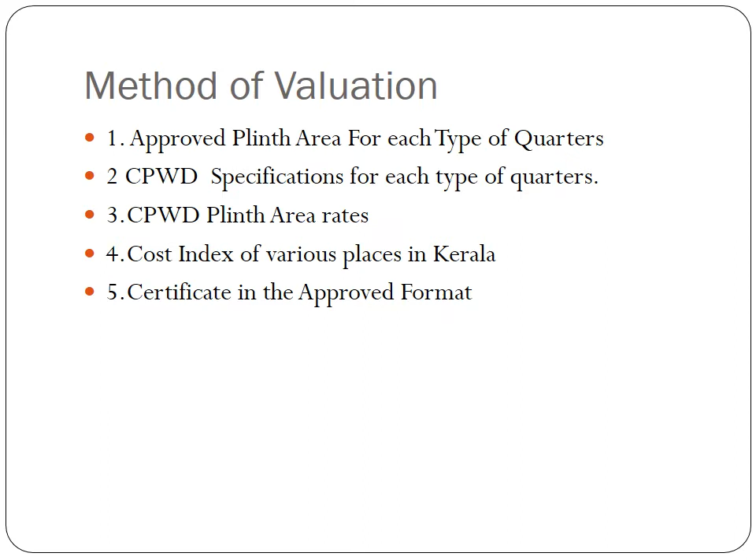There are some apprehensions among the valuers that by adopting CPWD plinth area rates and CPWD cost index, will it actually reflect the true market value of the building, or will it be more than the market price? But as per the government directions, the method of valuation adopting CPWD plinth area rates from time to time has to be followed as decided by the government for the specific purpose, namely valuation for registration of sale deed.

There will be a question, why CPWD plinth area rates of 2020 have not been adopted. The CPWD plinth area rates 2020 has been published only two weeks back. Only the plinth area rates have been published so far; the cost index for various places have not been published. Without the cost index, it is not possible to arrive at a reasonable value. When the cost index of 2020 is published, the CPWD plinth area rates will be adopted for valuation.

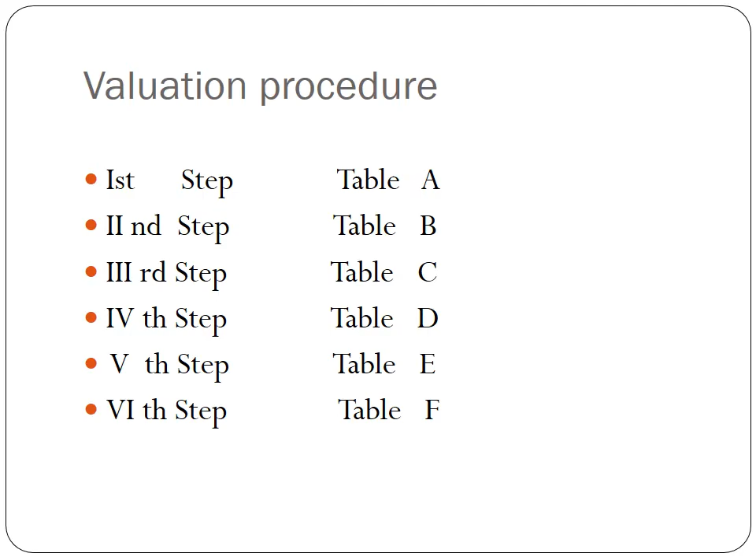This Table A gives the revised scale of plinth area for different types of cottage. You can see the first column giving the type of cottage, then the second column showing the scale of pay, that is not concerning us, then the third column gives the area of the cottage. From this, you can compare the building in question with the revised scale of plinth area provided in this table. There, you will come to the conclusion of which type of cottage the building to be valued belongs to.

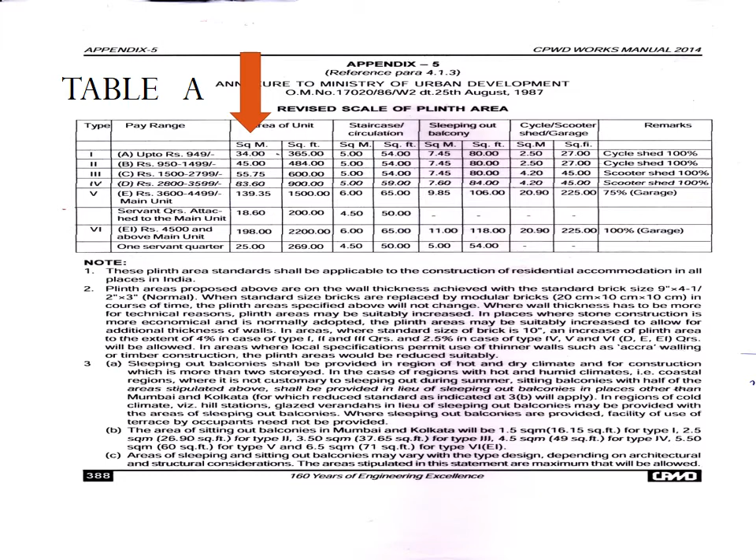This is Table B, giving the CPWD specification for residential buildings. You can see different types of cottage and also the specifications for foundation, superstructure, doors and windows.

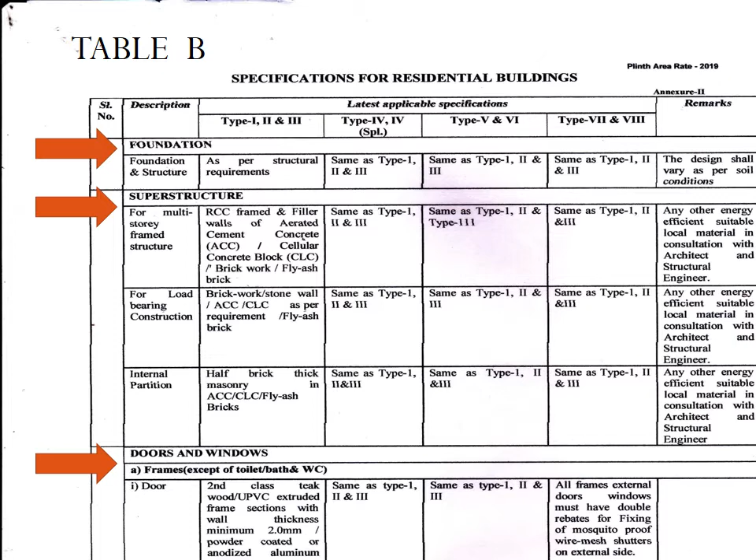This is the continuation of the specification showing doors and windows of toilet, baths, WC, main doors of external doors, etc.

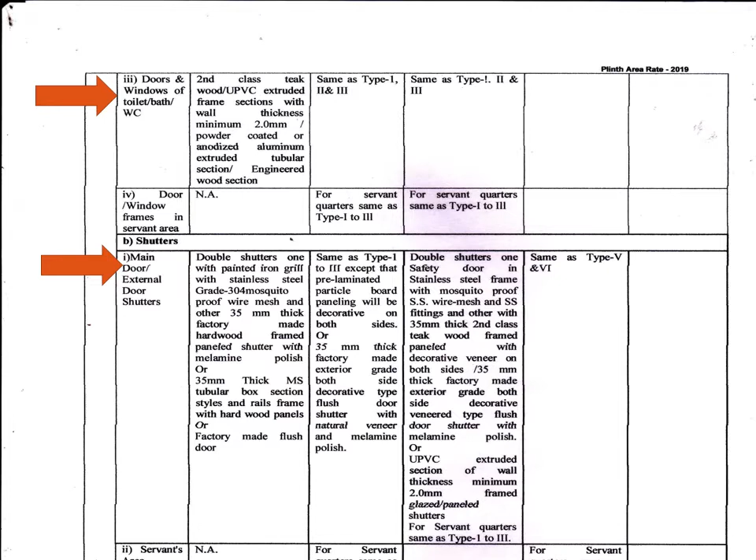This is also the continuation of the specification showing the shutters of windows, flooring for each type of cottage.

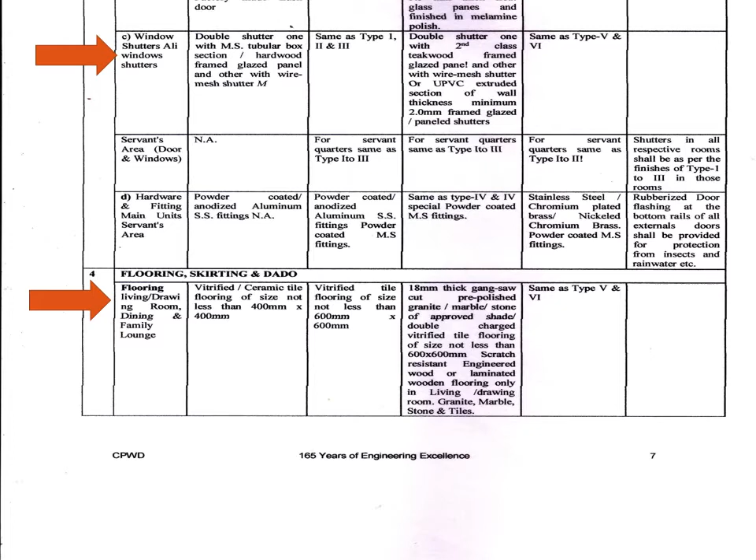This is also continuation showing the finishes and external finishes.

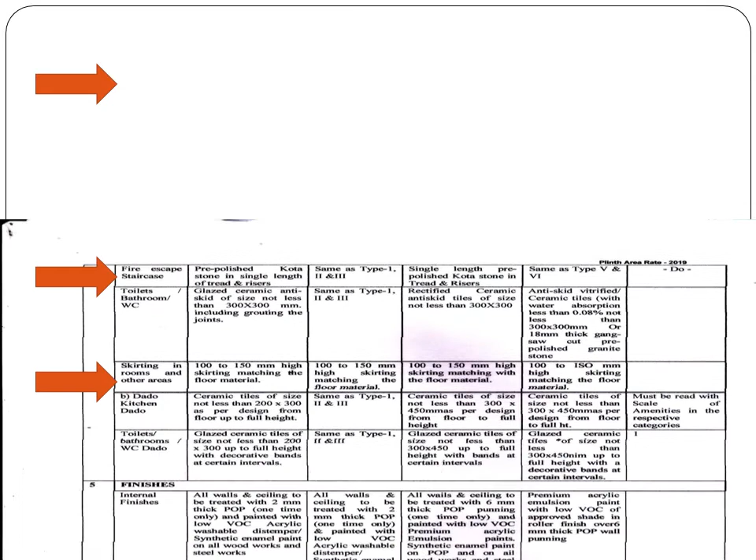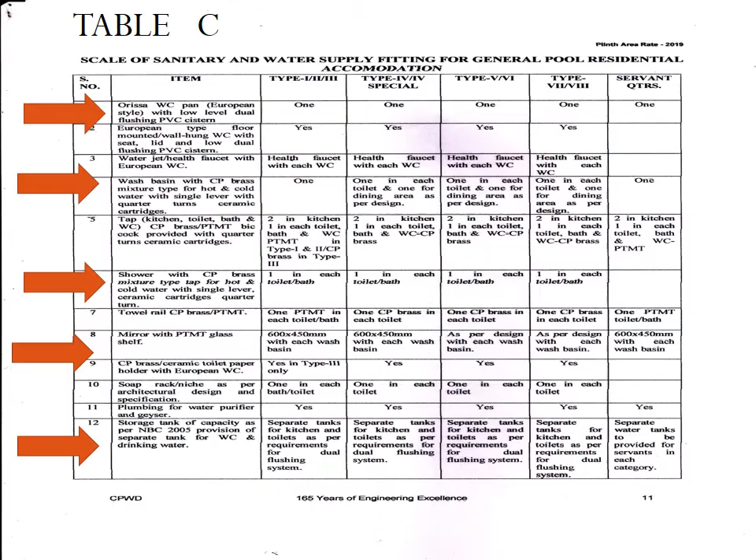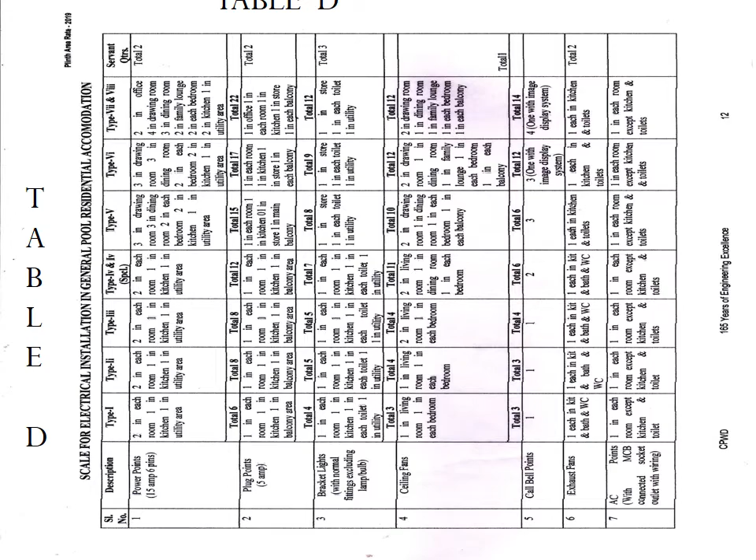This is table D showing the specifications of electrical installations in different types of residential accommodation. Please watch here. The tube lights are LED, the lights are also LED. So you have to compare the building under valuation whether LED lights and LED tube lights have been provided. If it is in a lesser specification, you have to make necessary deduction in the value.

This is continuation of the electrical installations.

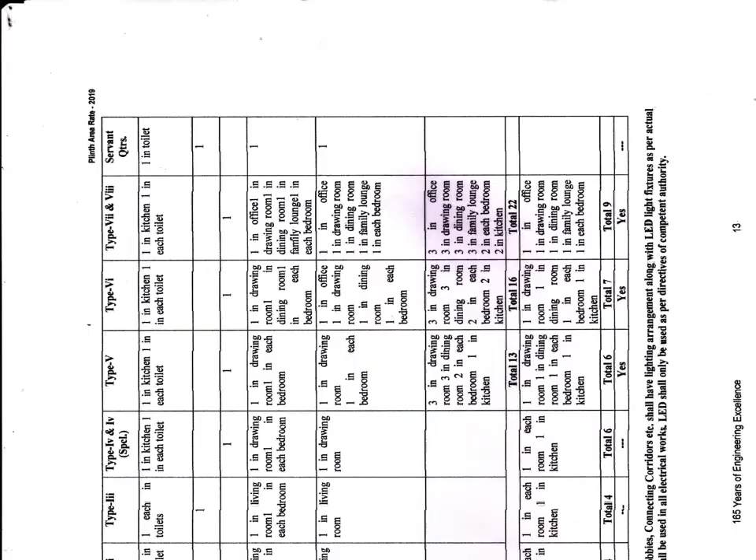This is the most important table in this valuation, table E. This is the CPWD plinth area rates as on 1/4/2019. The arrow shows the rate for load-bearing residential building, 16,600.

In the CPWD plinth area rates 2012, the residential building type 1 to 7 were divided into two categories and two rates were given. But in the plinth area rates of 2019, only a single rate has been given for type 1 to type 6 quarters and type 7 to type 8 bungalows.

There is a possibility that CPWD may have worked out an average value for all the quarters. This we will have to bring it to the notice of the Central PWD regarding this anomaly and has to be corrected.

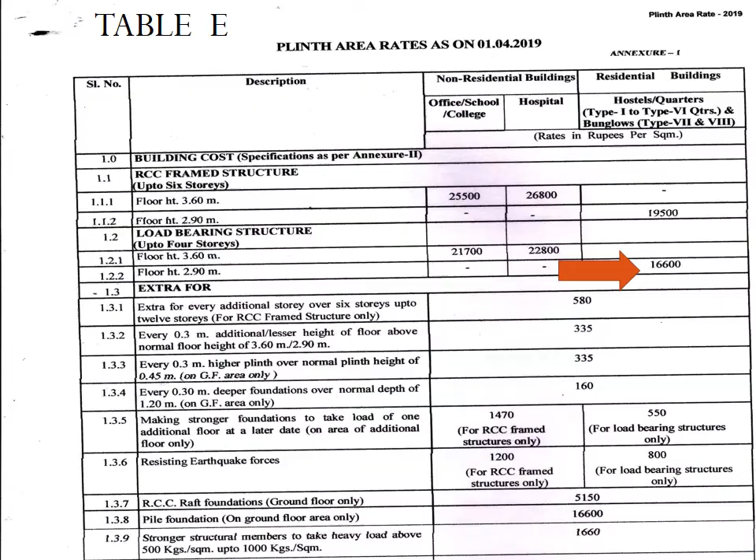Also you see internal electric installation, it is 12.5%. These percentages are at a higher side, but this is because of the higher specification provided for water supply and sanitary installations in the specifications, as well as the electrical installation.

As I have told earlier, these tube lights are all LED and the lights are all LED. So because of this higher specification, the rates have been given at a higher value. In case the building you are valuing doesn't have such higher or superior specification, and if it is lesser in specification, necessary deduction will have to be made by the valuer.

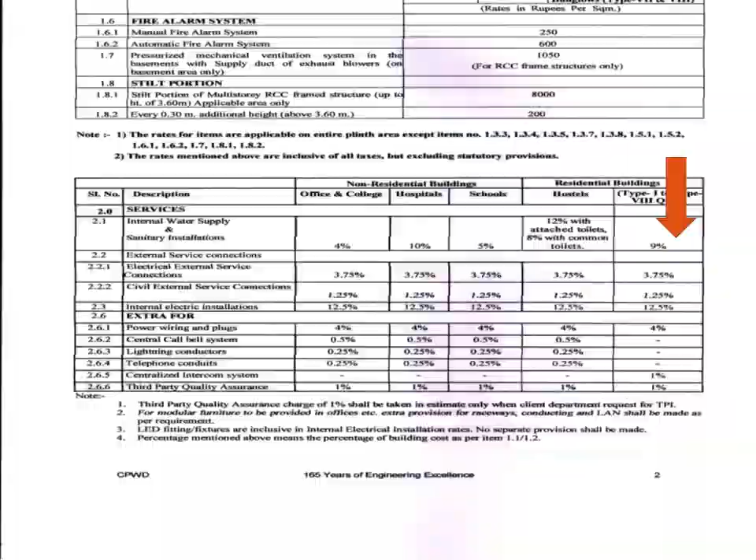This is the third sheet of table E. The arrow shows how to calculate for overhead tank without independent staging. This is 18 rupees per liter, and above it is the rate for passenger lifts.

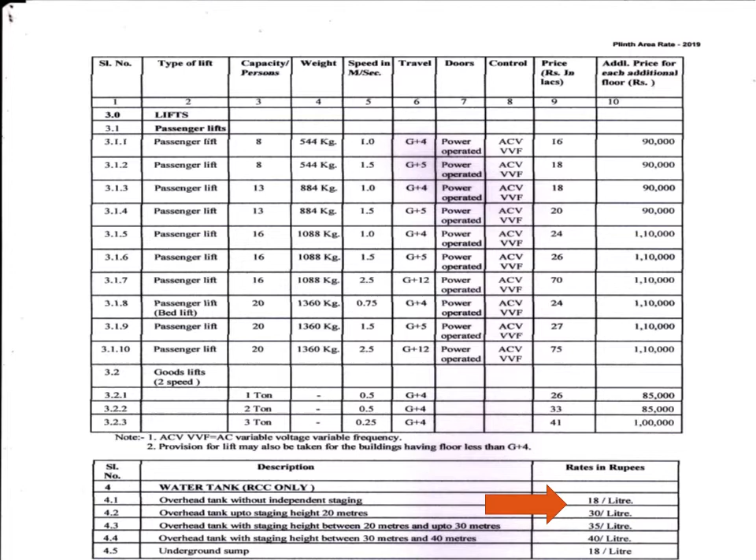This is the fourth sheet of table E. The arrow shows the rate for rain harvesting.

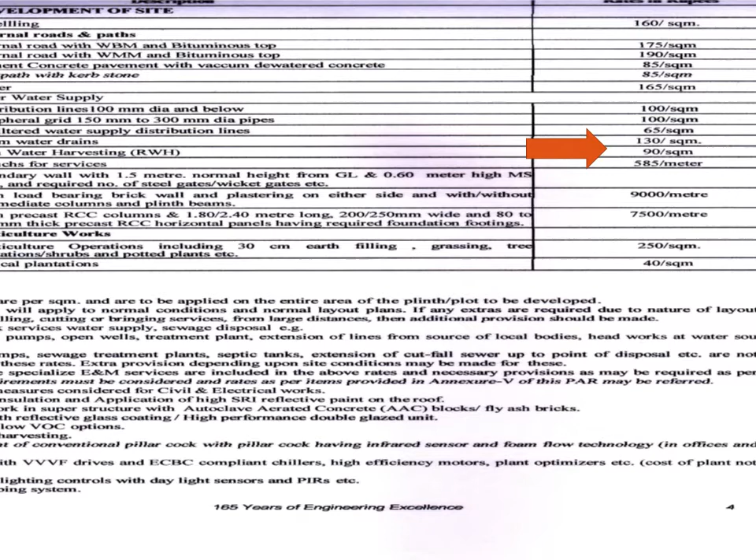The rate you work out as per the tables described earlier, R is the rate prevailing at Delhi, where the cost index is 100. So if you want to

compute the value of the building at Trivandrum, the cost you have worked out at Delhi has to be multiplied by this. Cost index of Delhi is 100, cost index of Trivandrum is 135, so the value worked out at Delhi has to be multiplied by 1.35 to arrive at the value at Trivandrum.

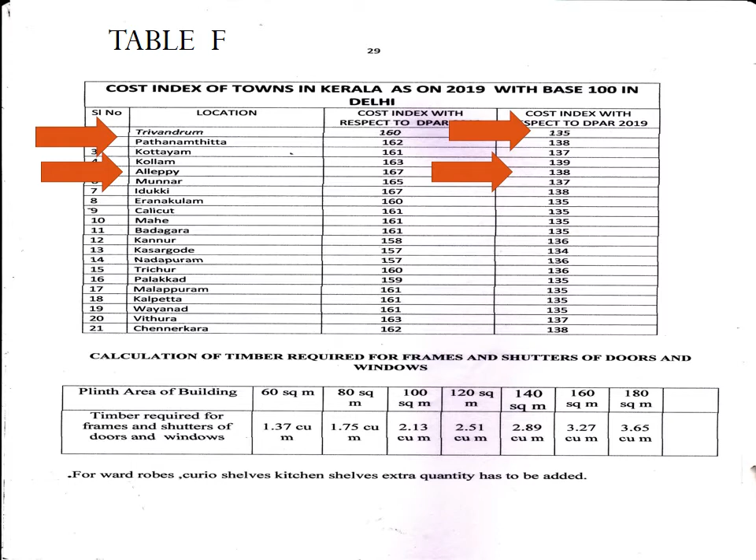The method of working out the value of the building has been explained in my previous narrations, and now we will examine case studies. Here 3 cases have been taken up for analysis.

Case 1. An RCC load-bearing residential building of plinth area 1000 square foot, foundation with RR and cement mortar, for superstructure with brickwork in cement mortar, doors and windows with second class teakwood, wardrobes in bedrooms, shelves in kitchen, walls plastered and painted, flooring with vitrified tile, bathrooms flooring with ceramic tiles, and the sides of walls with glazed tiles.

Building is electrified and has got water connection. The building is newly built, about 9 months old, located in Trivandrum. This is the specification of the building we are going to value.

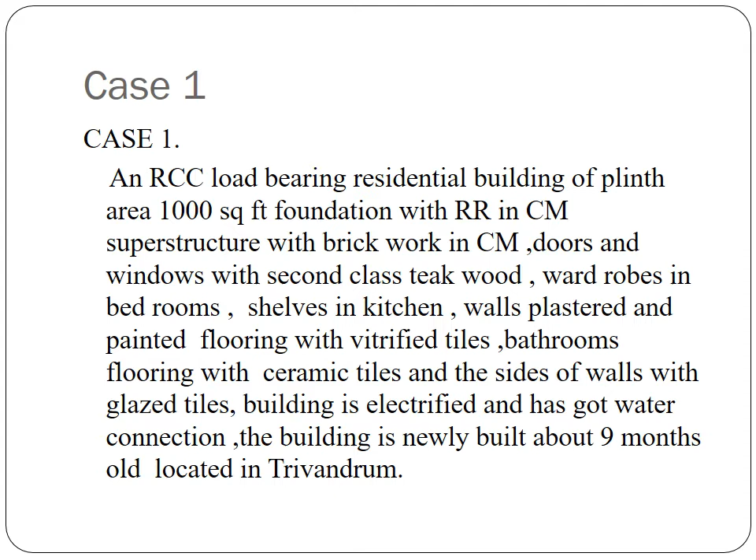Plinth area rate as per CPWD criteria is rupees 16,600 per square meter. Now add services. Internal water supply and sanitary installation at 9% equals 1,494 per square meter. Electrical external service connection at 3.75% equals 623 per square meter. Civil external service connection at 1.25% equals 208 per square meter.

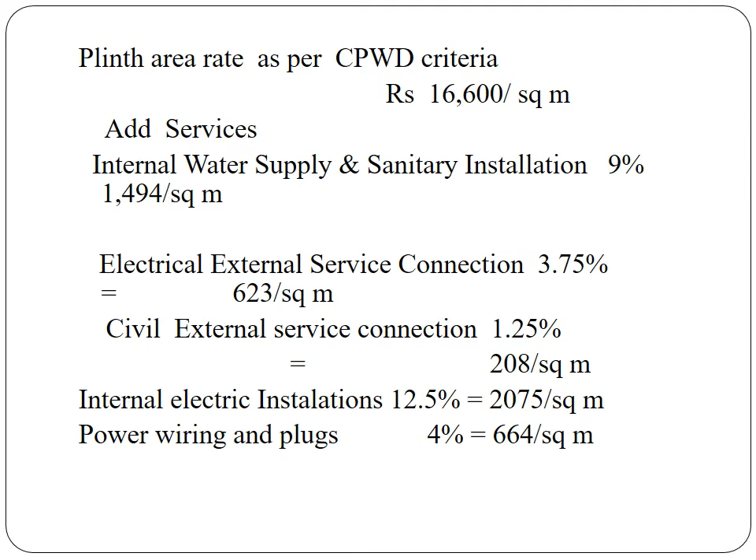Internal installations at 12.5% equals 2,075 per square meter. Power wiring and plugs at 4% equals 664 per square meter. Total amount comes to rupees 21,664 per square meter at Delhi. Hence, plinth area rate per square foot as on 2019 at Delhi is equal to rupees 2,013 per square foot.

The cost index of Trivandrum as on 1/4/2019 with respect to Delhi plinth area rates is 135. The plinth area rate in Trivandrum as on date is equal to 2,013 into 135 divided by 100, which is equal to 2,718 per square foot.

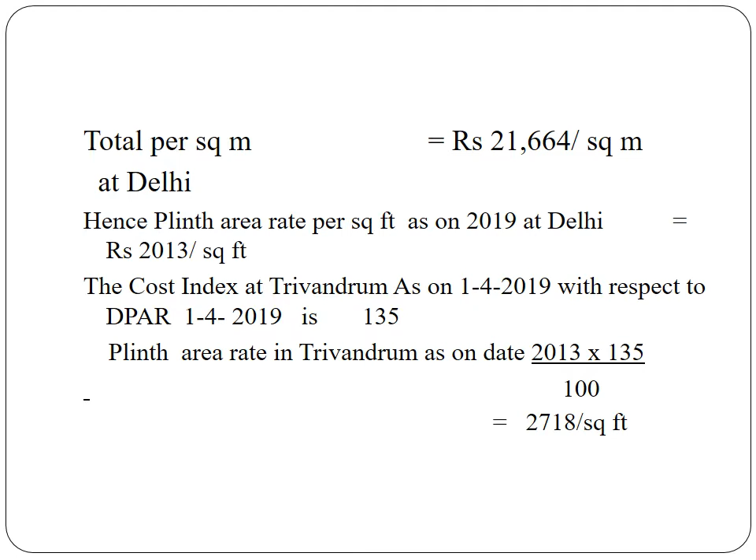Since the building is newly built, depreciation is not considered. If the valuer wants a very conventional valuation, 1% of depreciation can be considered. Without considering depreciation, the value of the building is equal to 1,000 into 2,718, which is equal to 27,18,000.

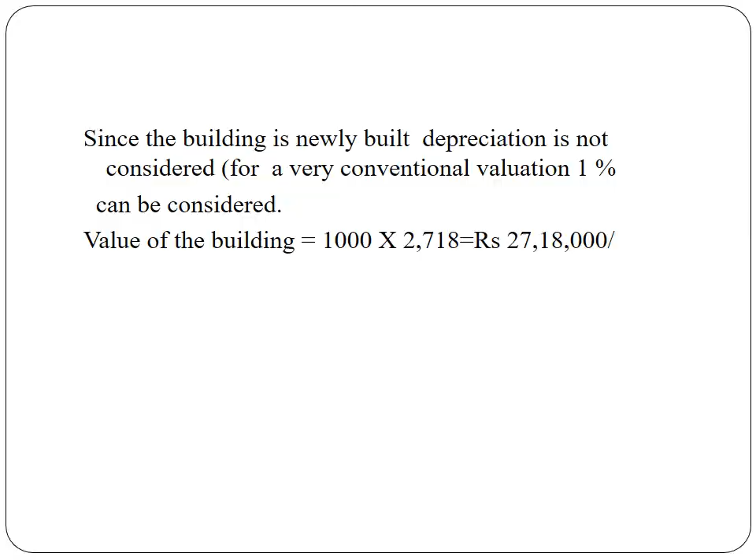Now case 2. Valuation of the building above, with same specification except the doors and windows are with country wood, and the age is 10 years. Plinth area rate as per CPWD criteria is 16,600 per square meter.

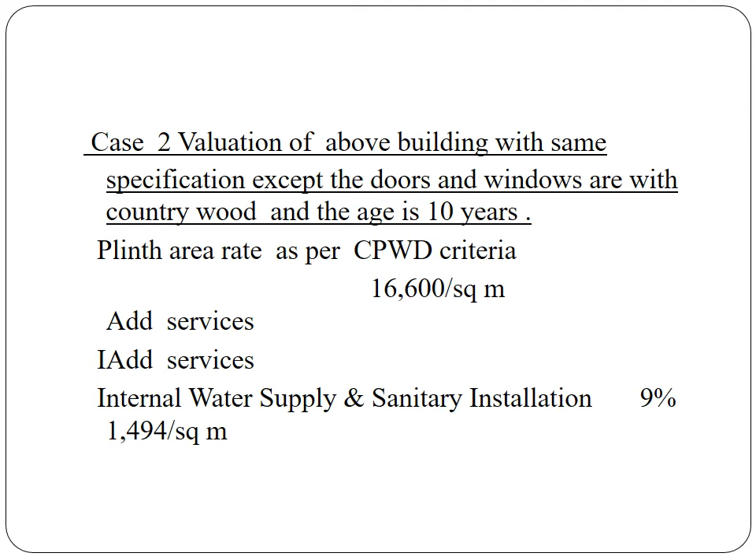Add services: internal water supply at 9%, same as previous one. Electrical external service connection, civil external service connection, internal electric installations, power wiring, etc.

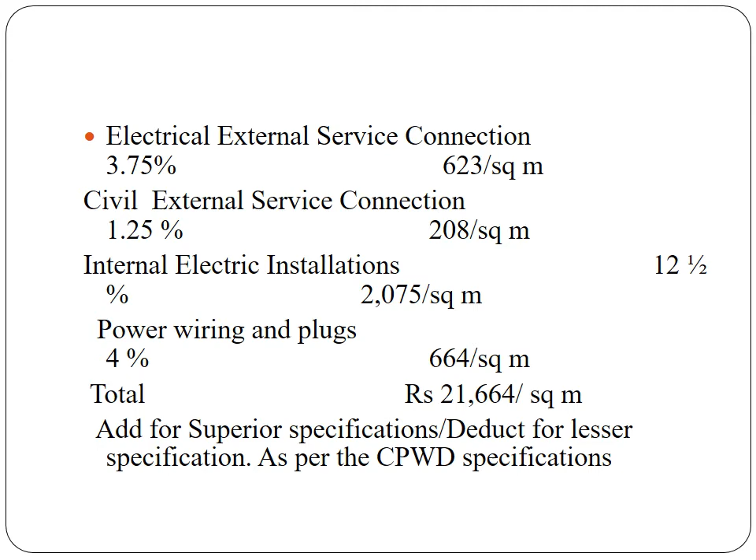This is very important. As per the CPWD specification, the doors and windows are to be with second class teakwood. But in this building, the doors and windows are with country wood. So the difference in cost of second class teakwood and country wood used has to be deducted.

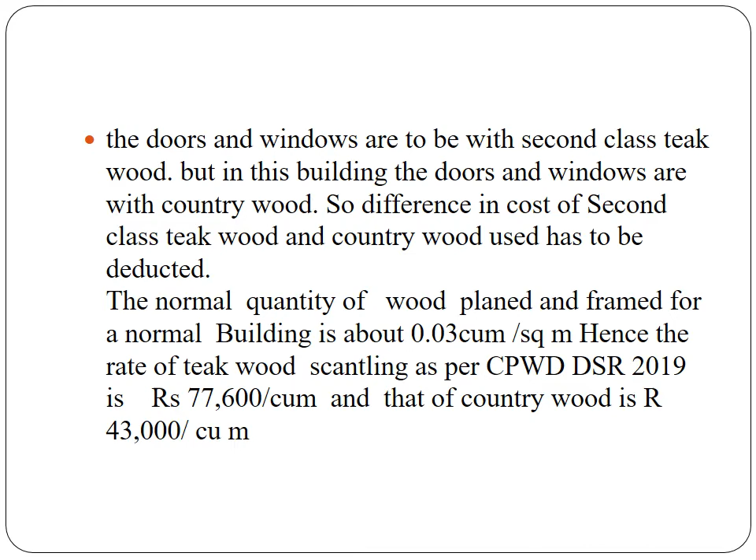Hence, difference in cost of teakwood and country wood is equal to 0.04 into 77,600 minus 43,000, which works out to 1,384 per square meter. This 1,384 per square meter has to be deducted from the plinth area rate of 21,664. Plinth area rate after deduction is equal to rupees 20,280.

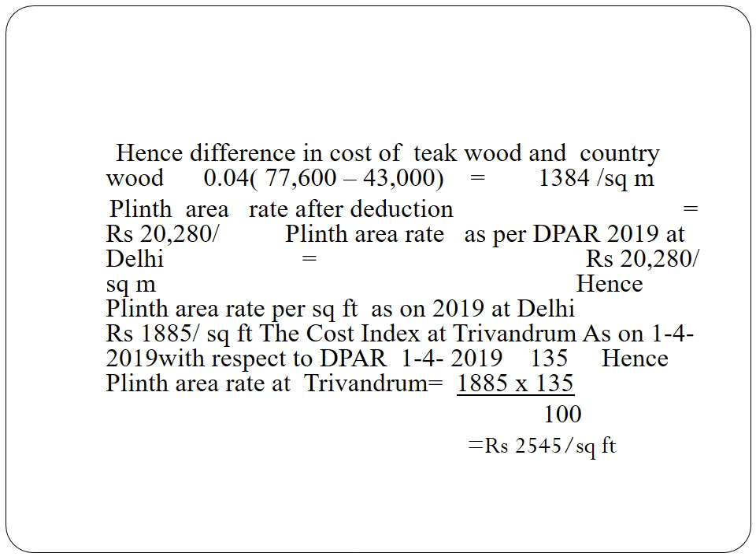So plinth area rate as per DPAR 2019 at Delhi is rupees 20,280. Plinth area rate per square foot as on Delhi works out to rupees 1,885 per square foot. The cost index at Trivandrum as on 1/4/2019 with respect to DPAR 1/4/2019 is 135.

Hence, the building is 10 years old. Estimated total life is 60 years. Hence, depreciation is worked out as 15%. So depreciation amount is rupees 382 per square foot. Hence, the depreciated rate is equal to rupees 2,163 per square foot.

Value of building is equal to 1,000 into 2,163, which is equal to 21,63,000.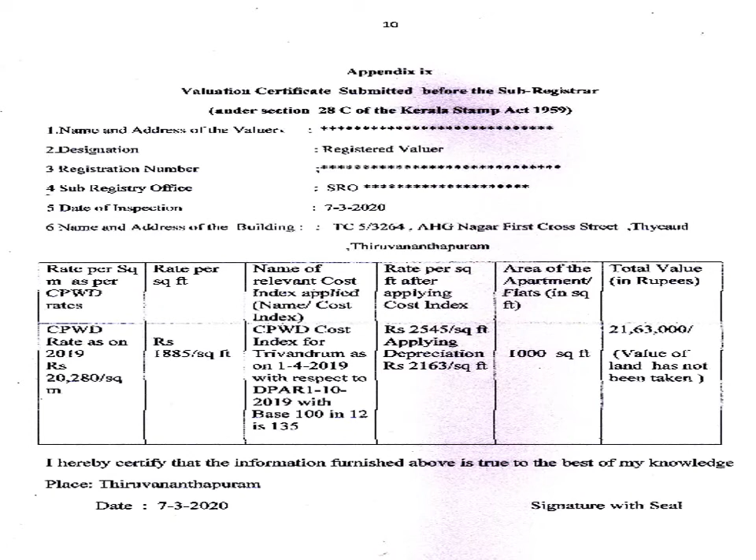In column 4, the rate worked out before applying depreciation is given as rupees 2,545 per square foot. Then applying depreciation, the rate works out to rupees 2,163 per square foot. Because there was criticism about how the depreciation can be shown in this column, this is the way which I have preferred to show the depreciation.

This is case 3. A tile building of plinth area 1,000 square foot with foundation of RR in cement mortar, doors and windows with country wood, walls plastered and painted. Only two small almarah in the bedroom, no mosquito shutters, flooring with ordinary cement. The building is electrified and has water connection. The building is 30 years old.

Building is located in Alleppey. Plinth area rate as per CPWD criteria is 16,600 per square meter.

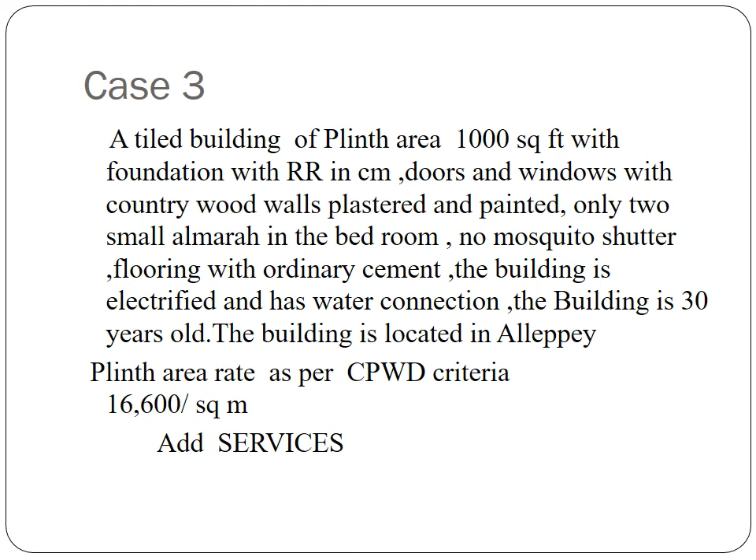Here, since this is an old building constructed 30 years back, the electrical connection will be single phase with just minimal lighting and light fittings. Also, water supply and sanitary fittings will be minimum and not as provided in the specification given in CPWD Plinth Area 2019. Hence, the valuer will make necessary deductions in the rate.

The percentage deduction is the priority of the valuer after assessing the condition. The following deductions are an example and not a strict rule to follow in the percentage deduction. It is up to the valuer to decide.

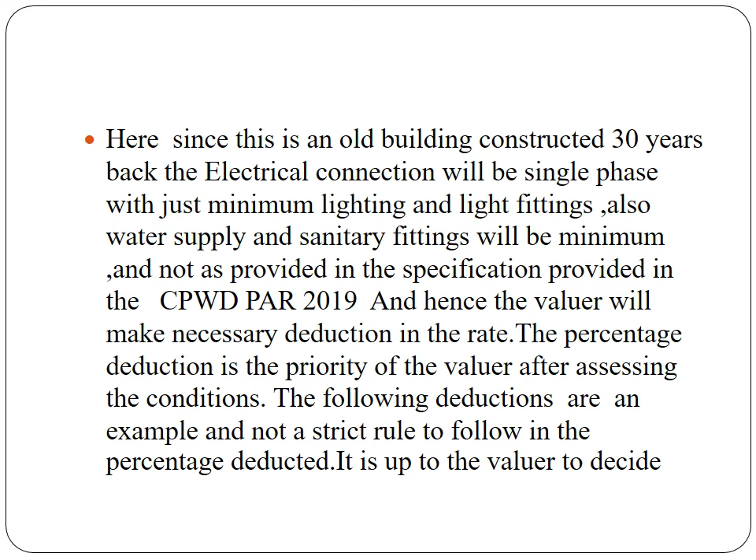Here, the first line, plinth area rate as per CPWD criteria is 16,600. Since the specification of the water supply installation and the electrical installations are not superior to the specifications of the CPWD book, for internal water supply and sanitary installation, instead of 9%, I have given only 6%. Also for internal electric installation, instead of 12.5%, I have given only 7.5%.

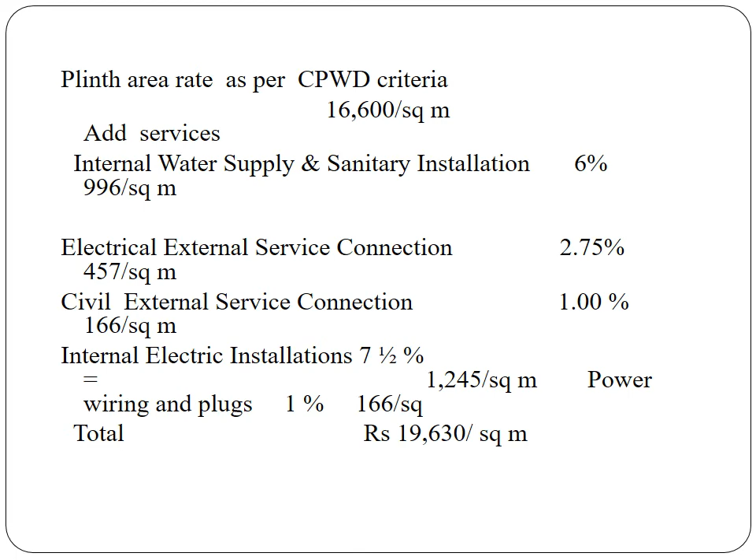According to the specification available in the building, these percentages can be deducted as per the discretion of the valuer. In this building, the roofing is tile roof, and the plinth area rate provided in CPWD specification is for RCC. Hence the difference in cost of RCC and tile roof will have to be deducted, which is equal to rupees 3,000 per square meter.

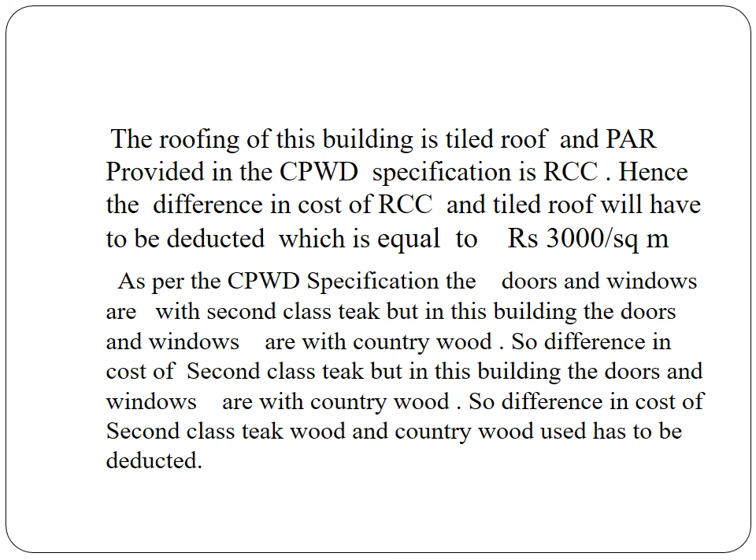As per CPWD specification, the doors and windows are with second class teakwood, but in this building the doors and windows are with country wood. So the difference in cost of second class teakwood and the country wood has to be deducted. So the deduction to be effected.

The normal quantity of wood planed and framed for a normal building is about 0.03 cubic meter per square meter. So for the difference in cost of teakwood and country wood, the reduction will be 1,384 per square meter. Difference in cost of RCC and tile roof is about 3,000 per square meter.

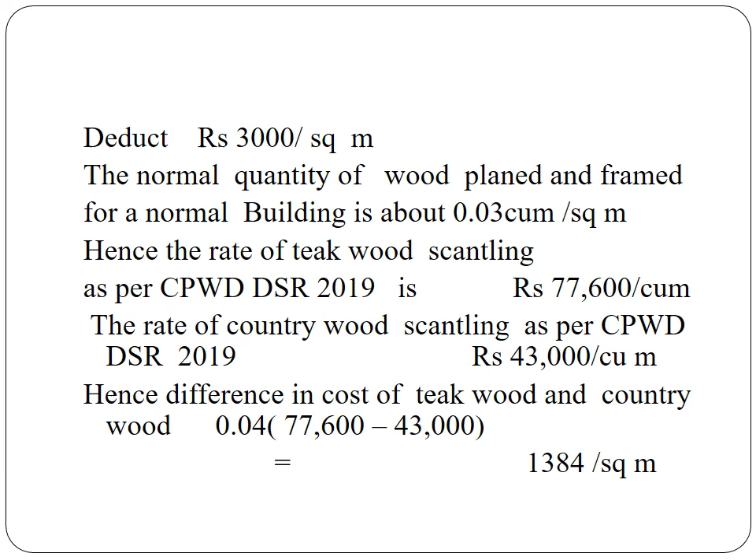Then again, in the specifications of CPWD, wardrobes will have to be provided and kitchen cabinets also to be provided. In this building, it's an old building with tiled roof. There are no wardrobes and kitchen cabinets, so that amount has to be deducted. This is assessed as about 1,20,000 for the 1000 square foot. So this gives the deduction amount as rupees 1,290 per square meter.

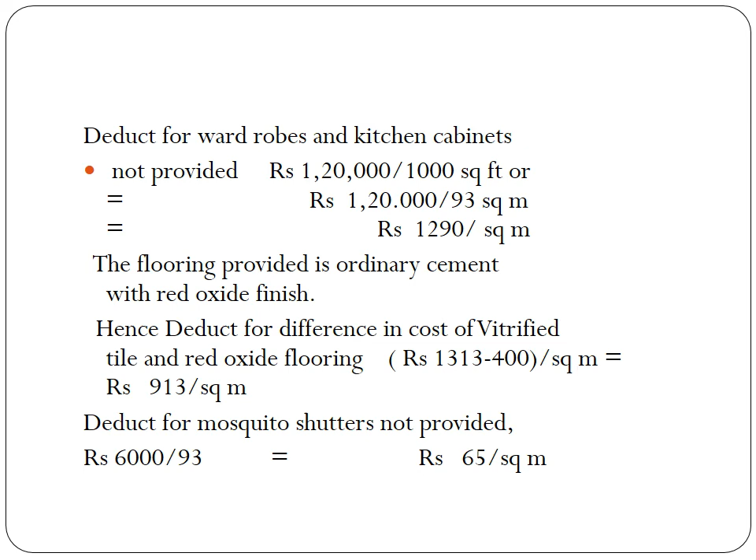In the specification of the CPWD for this cottage, the flooring is with vitrified tile, but in this building the flooring is with ordinary cement with red oxide finish. So we have to make the necessary deduction, which works out to rupees 913 per square meter. Mosquito shutters have not been provided, so rupees 65 per square meter has to be deducted.

So the total deduction to be made from the plinth area rate of 16,600 is rupees 6,652. Total after deduction is equal to 19,630 minus 6,652, which is equal to 12,978 per square meter. Plinth area rate in Delhi is 12,978 per square meter. So the plinth area rate as per square foot is rupees 1,206 per square foot.

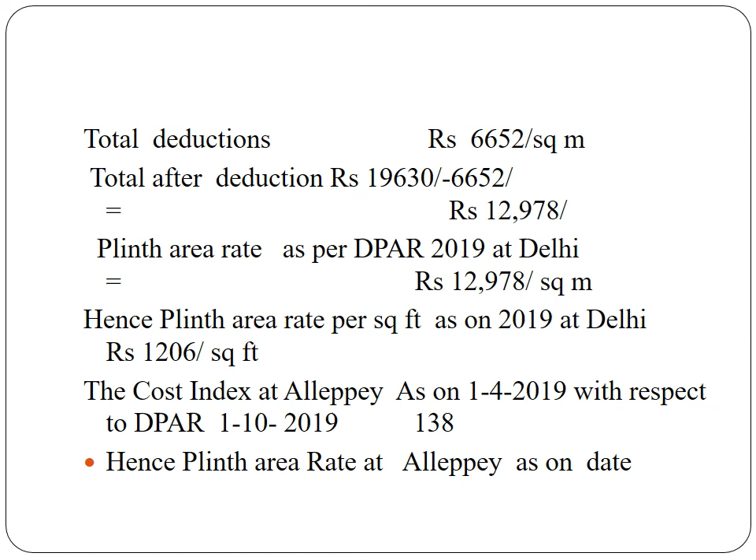Then the cost index of Alleppey is 138. As done in earlier examples, applying the cost index of Alleppey, the rate works out to rupees 1,664 per square foot.

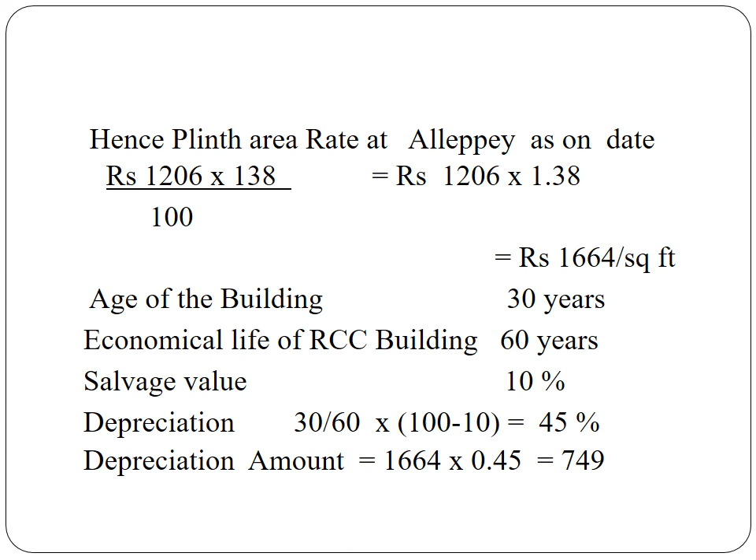Age of the building is 30 years, so in this case the depreciation is 45%. So the depreciation amount is rupees 749. Deducting the depreciation, the plinth area rate for this tiled building having a plinth area of 1000 square foot and 30 years old in Alleppey is 915 per square foot. So the value of the building is equal to 9,15,000.

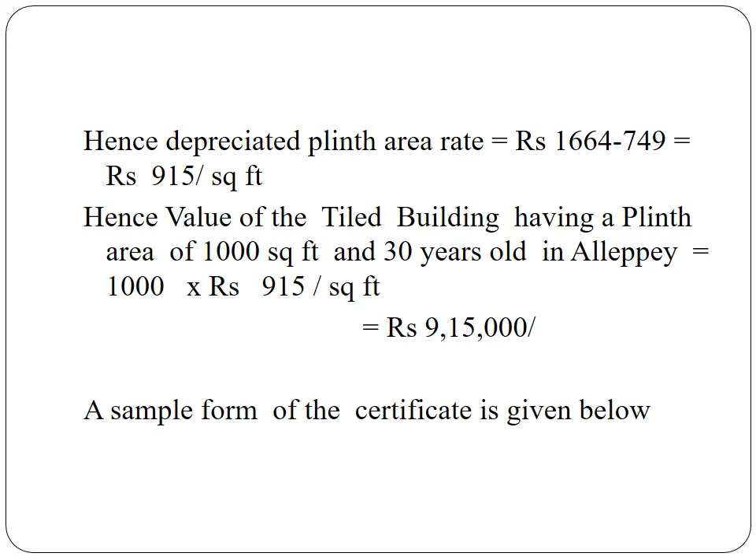This is the certificate to be issued. You can see in column 4 the rate worked out before depreciation is shown, and then the depreciated rate is given as rupees 915 per square foot, and the value of the building is 9,15,000.

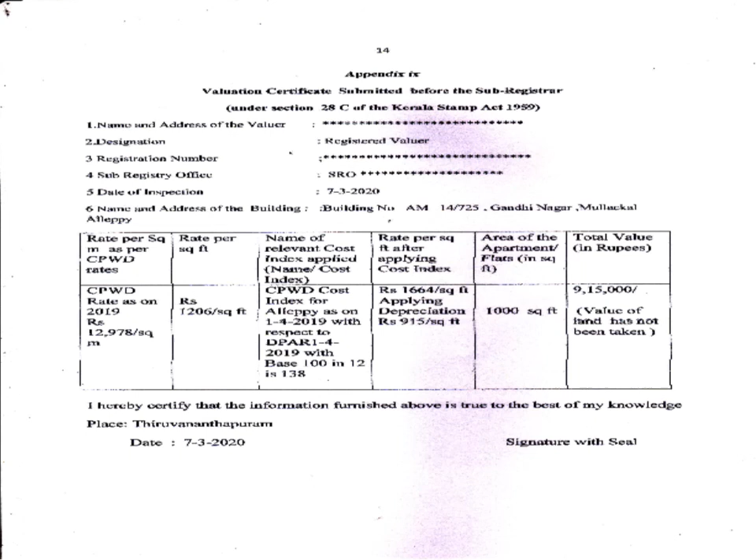The valuation for stamp duty is entirely different from valuation of market value of the property for mortgage and housing loan. The same property for bank purpose will give a different value than the valuation of the same property for stamp duty. The distress value of the same property will be much different from the market value. The same property will give a different value if it is for insurance purposes. The main underlying principle is that the value of a property varies according to time, place, purpose, and in whose hand.

The valuation for registration is for a specific purpose of computation of stamp duty and does not hold good for any other purpose. The government has decided on the method of valuation and the plinth area rate to be adopted, namely the CPWD plinth area rate published by the CPWD from time to time, and the cost index prevailing at the place of location.

Once again, in all the above examples, CPWD plinth area rate 2019 has been taken. Now, the CPWD plinth area rates 2020 with effect from 1/4/2020 have been published, but the building cost index of 2020 for various towns has not been published so far. So till the cost index of 2020 is published, the plinth area rates of 2019 can be used.